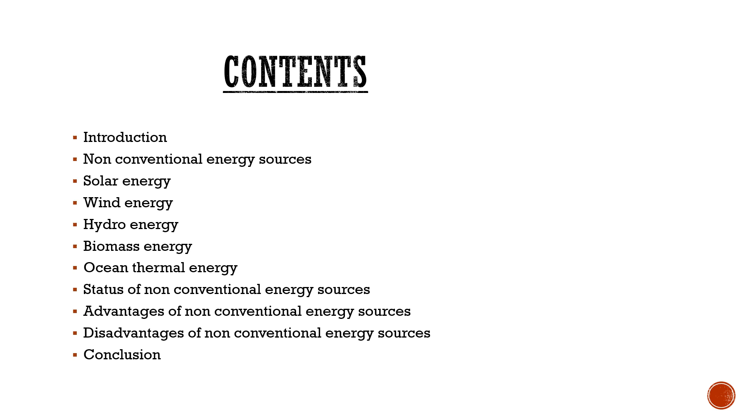Coming to the introduction, the sources of energy which are inexhaustible and being continuously produced in nature are called non-conventional energy or renewable sources of energy. Some of these sources include solar energy, wind energy, and tidal energy.

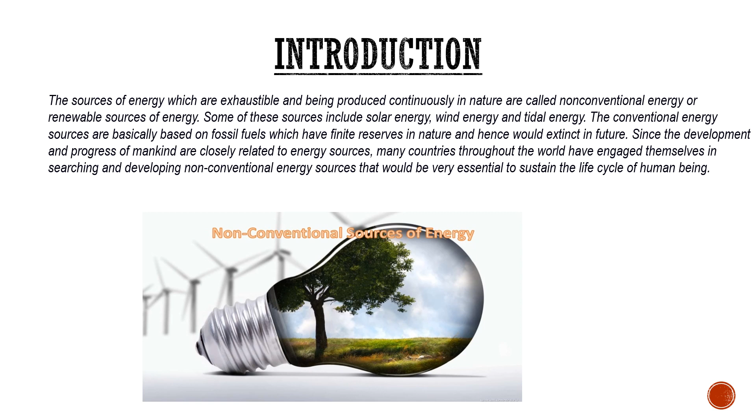The conventional energy sources are basically based on fossil fuels, which have finite reserves in nature and would get exhausted in future. Since the development and progress of mankind are closely related to energy sources, many countries throughout the world have engaged themselves in searching and developing non-conventional energy sources that would be used essentially to sustain the life cycle for humans.

Non-conventional energy sources: Energy is a primary and the most universal measure of all kinds of work by human beings and nature. Energy is a major input to drive the life cycle and improve it. Energy consumption is closely related to the progress of mankind in future, improvement in the living standard of mankind, industrialization of developing countries, and the global demand for energy increases with the ever-growing population.

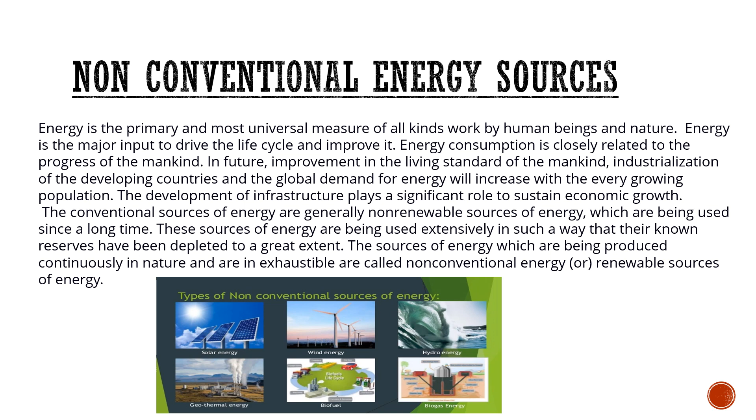The development of infrastructure plays a significant role in sustaining economic growth. The conventional sources of energy are generally non-renewable sources of energy which have been used since a long time. These sources of energy have been used so extensively that their known reserves have been depleted to a great extent. The sources of energy which are produced continuously in nature and are inexhaustible are called non-conventional energy or renewable sources of energy.

Solar energy is the most readily available and free source of energy since prehistoric times. It is estimated that solar energy equivalent to over 15,000 times the world's annual commercial energy consumption reaches the earth every year. Solar energy can be utilized through two different routes: the solar thermal route and solar electrics, that is, by using solar photovoltaics.

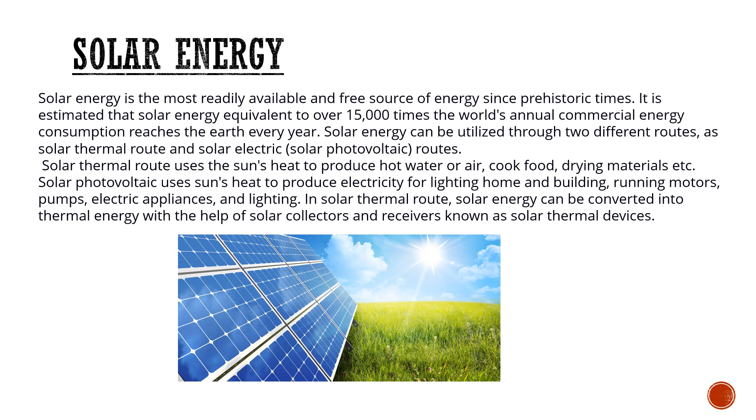The solar thermal route uses the sun's heat to produce hot water or air, cook food, dry materials, etc. Solar photovoltaic uses the sun's energy to produce electricity for lighting homes and buildings, running motors, pumps, and electric appliances. In the solar thermal route, solar energy can be converted into thermal energy with the help of solar collectors and receivers known as solar thermal devices.

Wind energy is basically the harnessing of wind power to produce electricity. The kinetic energy of the wind is converted into electrical energy.

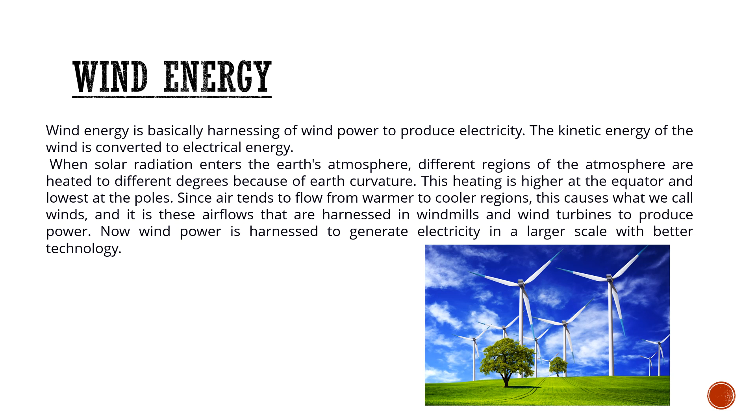When solar radiation enters the Earth's atmosphere, different regions are heated to different degrees because of the Earth's curvature. This heating is higher at the equator and lower at the poles. Since air tends to flow from warmer to cooler regions, this causes what we call winds, and it is these air flows that are harnessed in windmills and wind turbines to produce power. Now wind power is harnessed to generate electricity on a large scale with better technology.

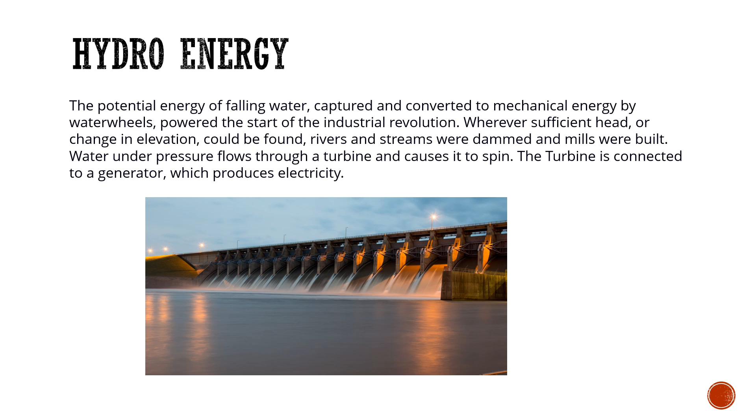Hydro energy: the potential energy of falling water, captured and converted to mechanical energy by water wheels, powered the start of the industrial revolution. Whenever sufficient head or change in elevation could be found, rivers and streams were dammed and mills were built. Water under pressure flows through a turbine and causes it to spin. The turbine is connected to a generator which produces electricity.

Biomass energy: Bioenergy is a form of biogas derived from biomass, and is expected to become one of the key energy resources for global sustainable development. Biomass is a renewable energy source derived from the carbonaceous waste of various human and natural activities. Biomass does not add carbon dioxide to the atmosphere, as it absorbs the same amount of carbon in growing as it releases when consumed as fuel.

Its advantage is that it can be used to generate electricity with the same equipment that is now being used for burning fossil fuels. Bioenergy is being used for cooking, mechanical applications, pumping water, and generating electricity.

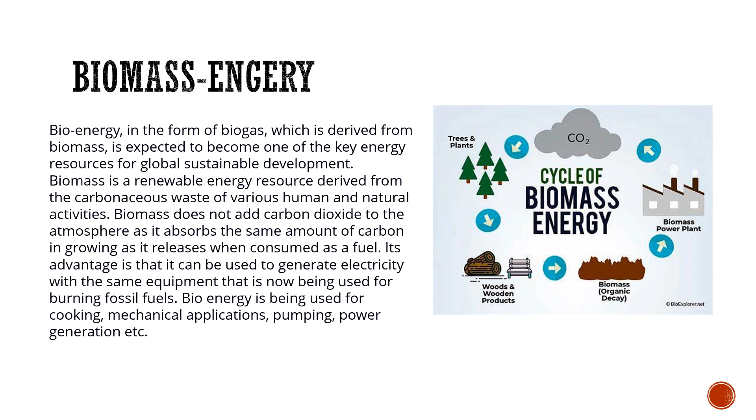Ocean thermal energy conversion is a form of energy conversion that makes use of the temperature differential between the warm surface water of the ocean, heated from solar radiation, and the deepest cold waters to generate power in conventional heat engines.

The difference in temperature between the surface and the lowest water layer can be as large as 50 degrees Celsius over a vertical distance as little as 90 meters in some ocean areas. To be economically practical, the temperature differential should be at least 20 degrees Celsius in the first 1000 meters below the surface.

In the first decades of the 21st century, the technology was still considered experimental, and thus far no commercial ocean thermal energy conversion plants have been constructed.

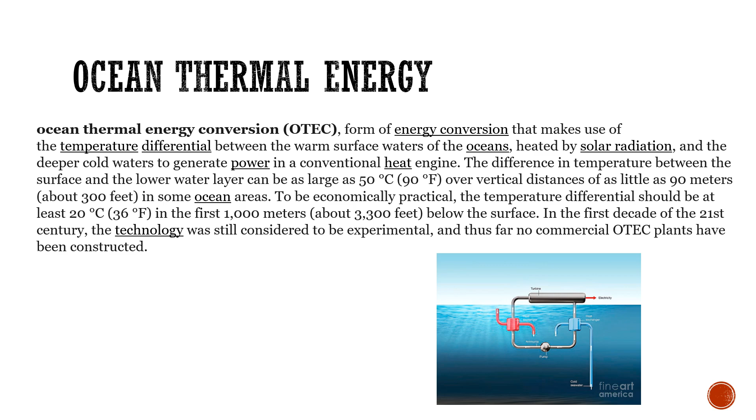Present status on non-conventional energy sources. In India, the Department of Non-Conventional Energy Sources was created in the Ministry of Energy in the year 1982 to look after all aspects relating to new and renewable energy.

The department was upgraded into a separate Ministry of Non-Conventional Energy Sources in 1992 and was rechristened as the Ministry of New and Renewable Energy Sources in October 2006.

As per the information furnished by the MNRE, starting with the ninth plan, there has been a consistent increase in the pace of renewable energy development. In India, renewable energy installed capacity has grown at an annual rate of 23%.

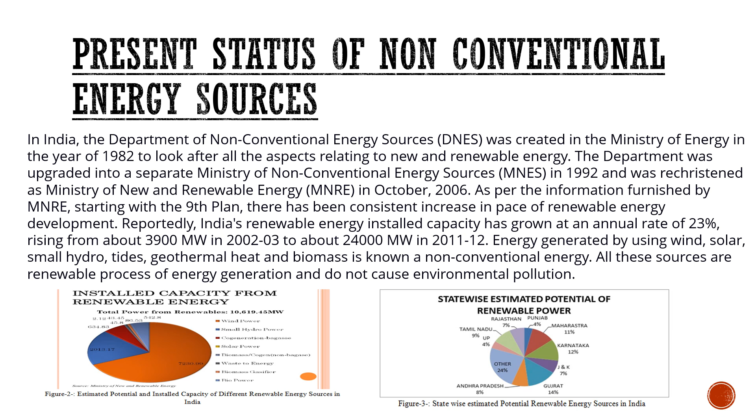The use of small hydro, tides, geothermal and biomass is known as non-conventional energy. All of these sources are renewable sources of energy generation and do not cause environmental pollution.

Advantages of non-conventional energy sources. Non-conventional or renewable energy is an indigenous source available in considerable quantities to all developing nations, and is capable in principle of having a significant local, regional or national economic impact.

There is great scope for research and development in non-conventional energy sectors regarding its future development and scientific utilization. The power plants based on renewables do not have any fuel cost and have negligible running cost.

Renewables have low energy density, and more or less there is no pollution or ecological balance problem. The use of non-conventional energy could help conserve foreign exchange and create local employment.

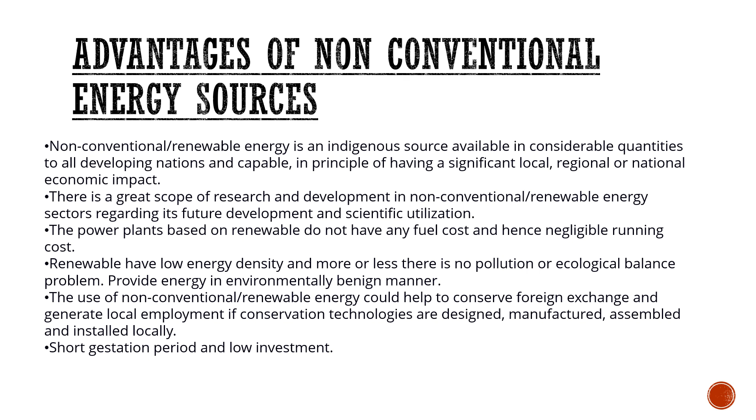The disadvantages of non-conventional energy sources are such as: solar and wind power rely highly on the weather, which can make it difficult to generate consistent and reliable power.

The initial investment required to set up a non-conventional energy system can be quite high, which may not be feasible for some individuals or organizations.

Non-conventional energy sources such as solar and wind power often generate large amounts of energy during peak times, but storage options for this excess energy may not be efficient or cost effective.

Non-conventional sources of energy have a limited capacity when compared to conventional sources such as coal and natural gas, which can limit their overall potential.

Finally, non-conventional energy sources can also have negative environmental impacts, such as large-scale hydroelectric dams that can cause habitat destruction and displace local communities.

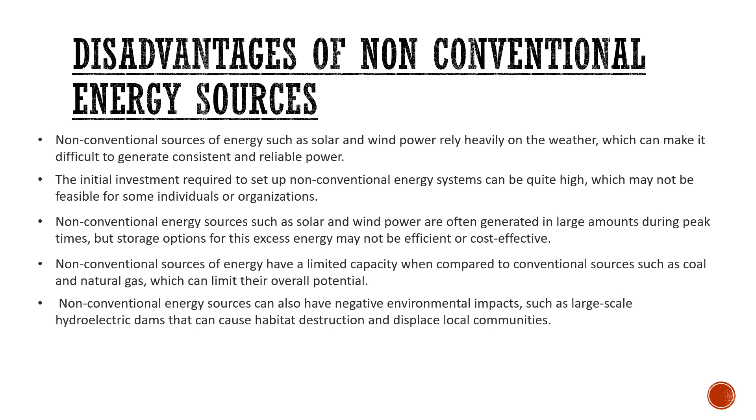Finally, the conclusion for the topic is that the sustainable economic development and growth of any country are closely related to the development and security of its energy sectors. Concerning the finite and limited nature of these energies and their impact on the environment, great emphasis should be given to the development of non-conventional energy sectors.

And their proper utilization for the benefit and betterment of mankind. Such initiatives would also help create many employment opportunities at all levels, especially in rural areas. Thus, mainstreaming of non-conventional and renewable energy technologies is becoming very essential for developing countries.

In India, there is great scope for the development of non-conventional and renewable energy sectors. India is the only country that has an exclusive Ministry of New and Renewable Energy Sources.